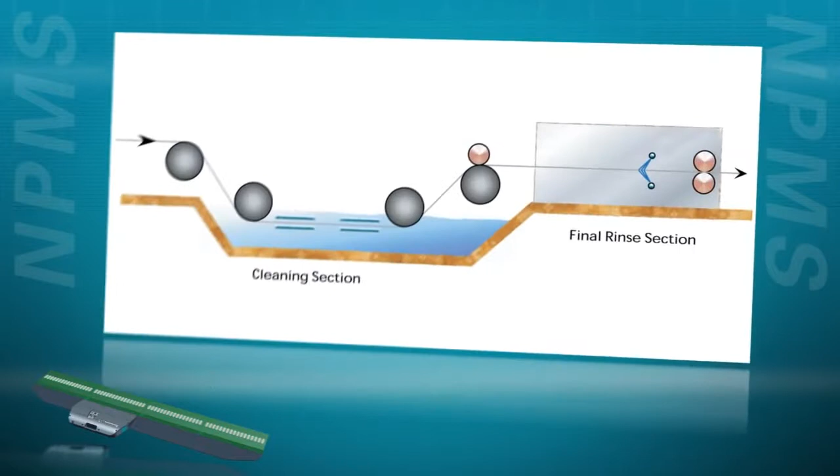What I would like to do now, if you fellows would bear with me a little bit, is show you some of the applications where the nip pressure measuring system can be very effective. You can use them on galvanizing lines after the rinse sections. You can use them on continuous annealing lines, which is a problem area, especially on the vertical pass line.

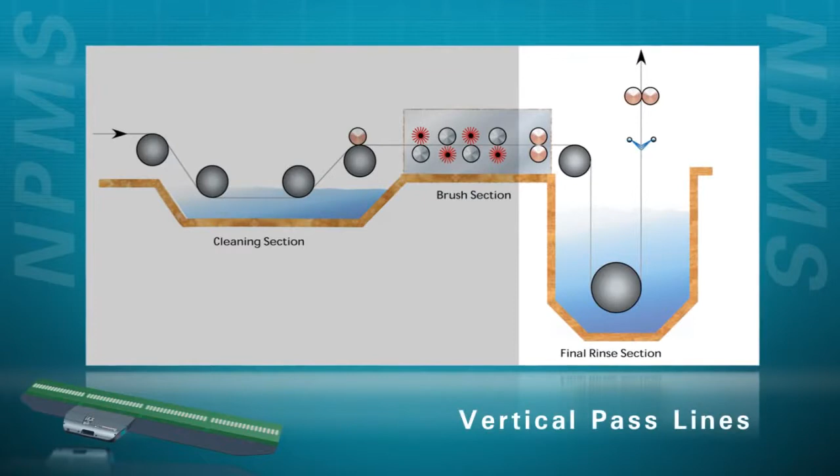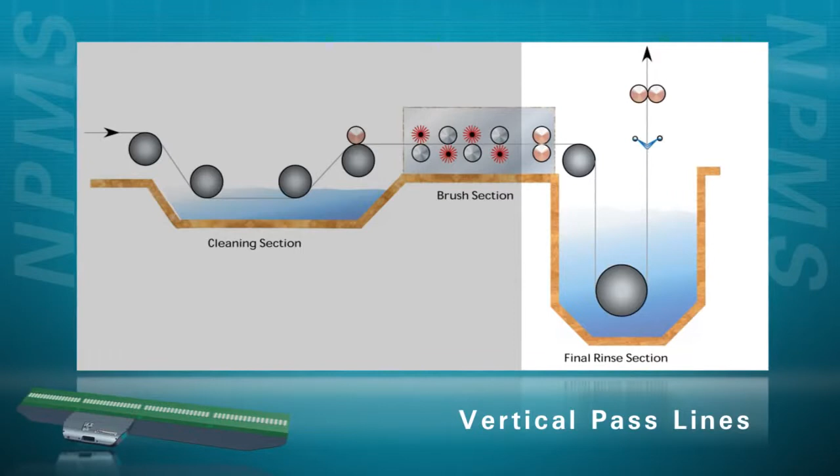Those rolls are hard to determine when they are ineffective. We can show you the condition of those rolls. They're very effective on pickle lines. They're really very effective on many process lines that you have throughout the mill.

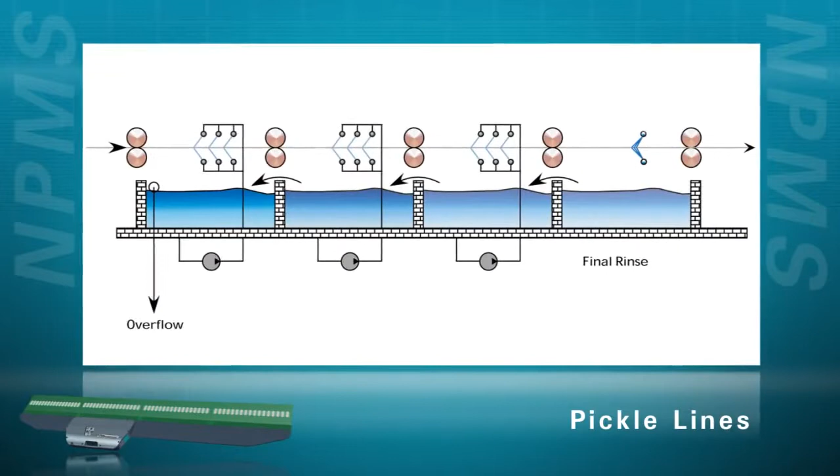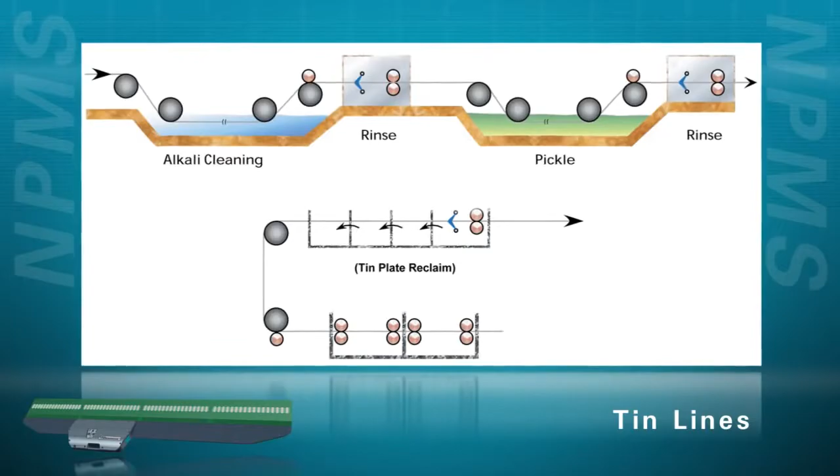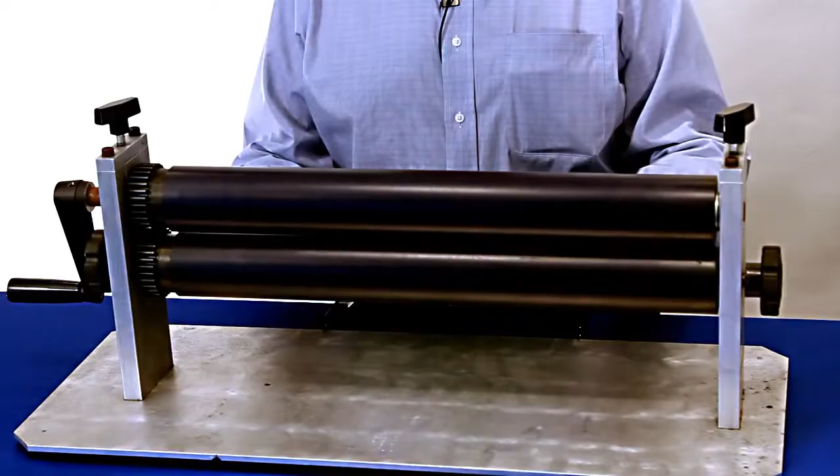What I'd like to do now is show you the real uniqueness of the nip pressure measuring system. So we have this model. We'd like to put it in front of you now. We have the instrument right here. Obviously it's only 18 inches long, and most of you have mills a lot longer than 18 inches. But for the demonstration purpose, I'd like to put this instrument between a set of pinch rolls.

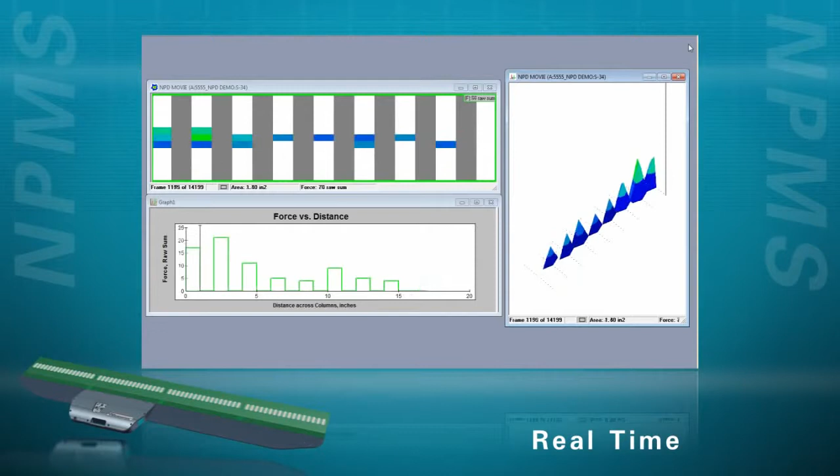I'd like to adjust the pressure and show you how it changes real time as the load is changing. One end to the other. You can see it in 2D, and if you look on the computer readout now, you can see it on 3D.

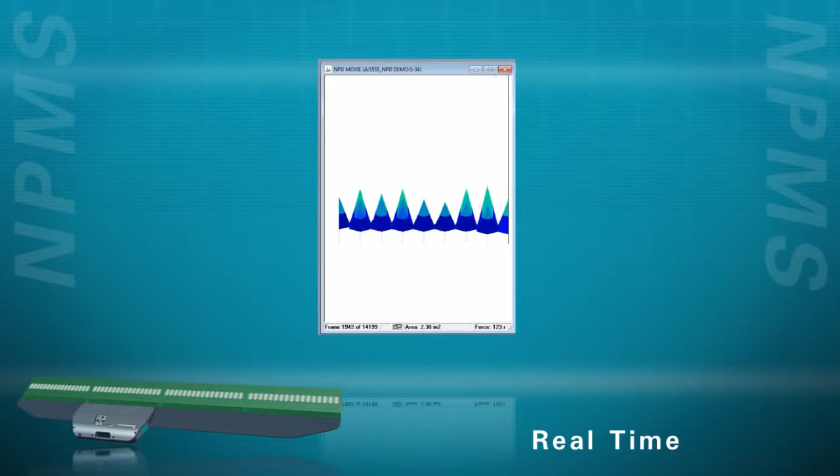Notice on 3D you can have it in the vertical position, you can have it in horizontal position, you can change it. And some of you fellows will have particular reasons you want to do that. That's in the software, and it's available to all of you.

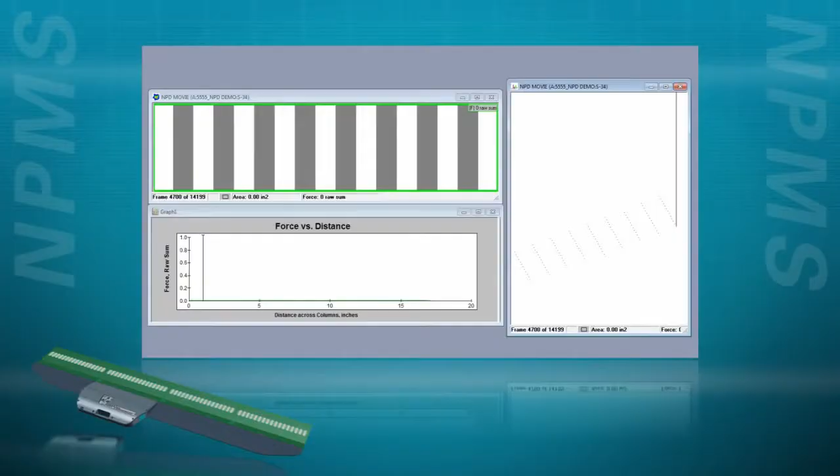One of the other features of the nip pressure measuring system is that we can show you misalignment of your rolls, a problem many people have. I can't misalign the rolls, but I can misalign the instrument. So I just did it. I'm showing you on 3D how the pressure is shown from one side of the image to the other side.

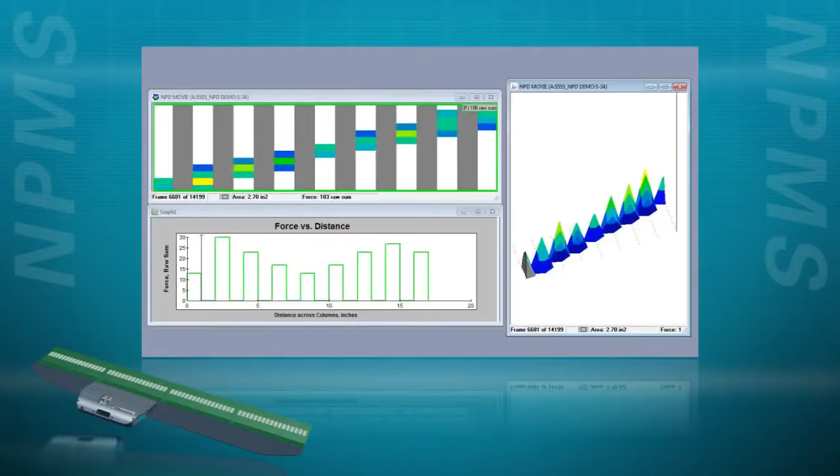You can see it in the horizontal, you can see it in the vertical, you can see it in the different planes. Now what I'd like to do is show you misalignment in the opposite direction. And again, I'll adjust the pressures. And you can see now, especially on the 3D computer readout, how those pressure profiles are shown on the image.

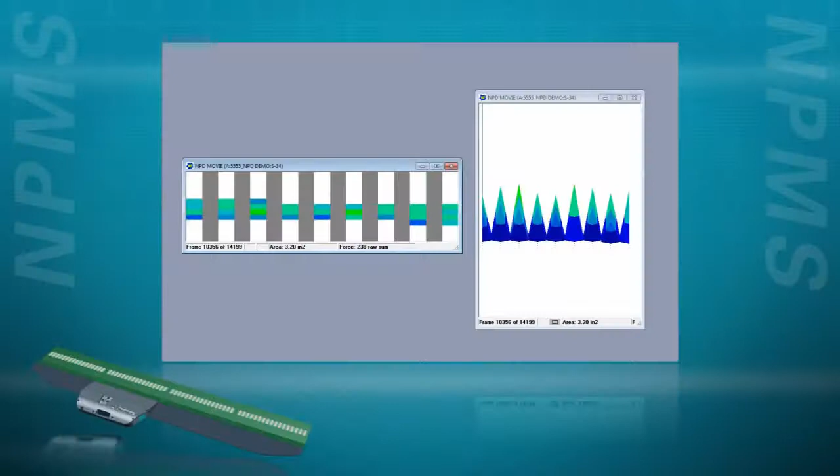So since you know the misalignment exists on the rolls, you can call your associate in, make the adjustments on your equipment, put the instrument back in between the rolls, and when you get the misalignment corrected, you should have a straight line readout, be it 3D or be it 2D.

The last feature I want to show you is the feature of roll crowning.

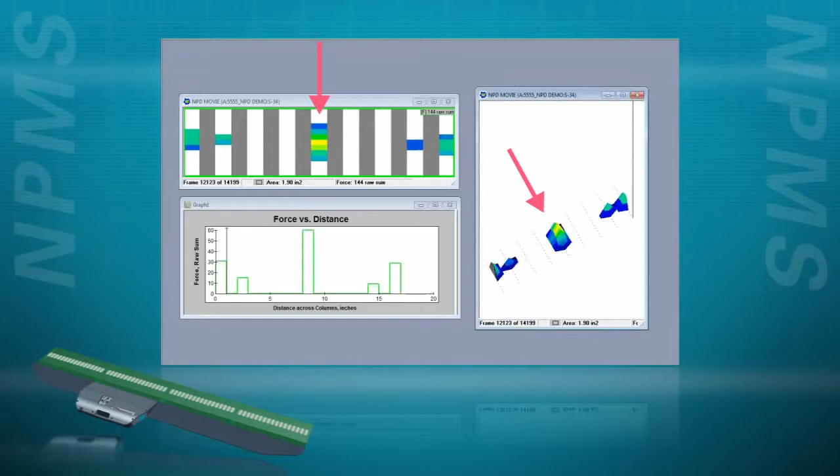This set of pinch rolls was deliberately ground in the concave center. I don't have a feeler gauge, but I have two name cards. They're about 8 thousandths, so I'll put those between the rolls, and I'll simply show you deliberately putting a crown in the rolls. And once again, as the pressure is adjusted, 3D and 2D, you can see the crown in the rolls.

You can not only see the crown, you can see if the crown's in the center of the roll. Sometimes we're told by roll grinders that the crown is centered on the roll, and many times we find out it's not on the center. This instrument will clearly show you that.

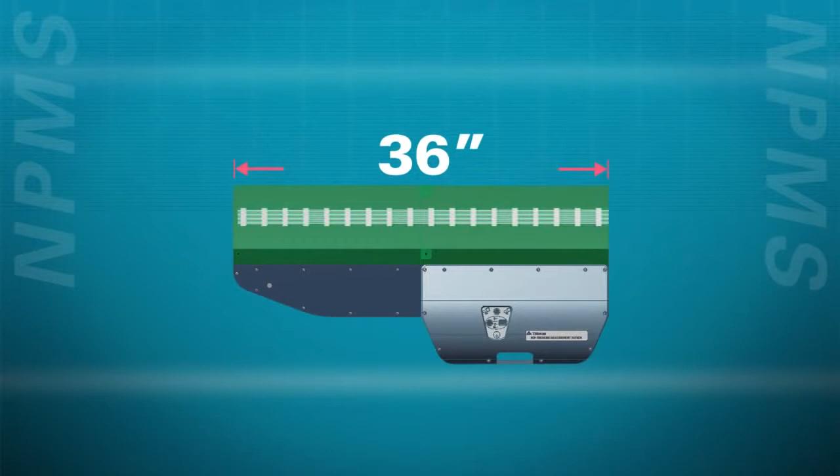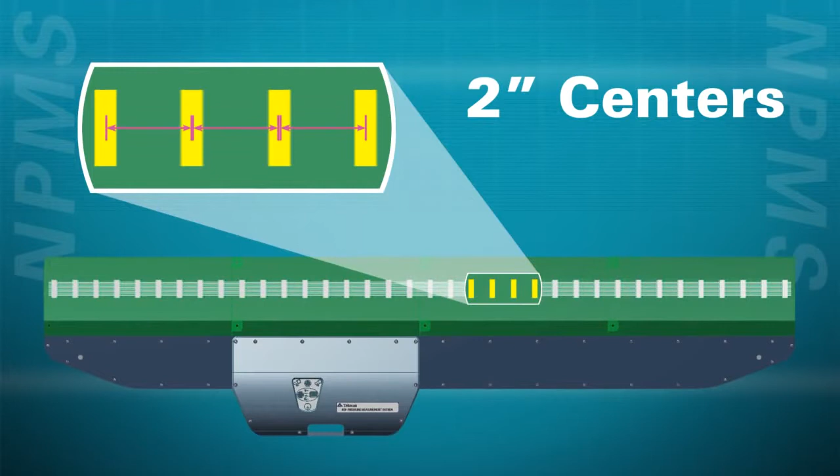What we'd like to do now to go on with our little talk with you fellows is to tell you a little bit about the design concepts of the NPMS system. We have the instrument designed for 4 different strip widths: 18 inches, 36 inches, 54 inches, and 72 inches. We have sensors that are located on 2-inch centers along the full length of the sensor element, and they cover a grid width of 1.5 inches.

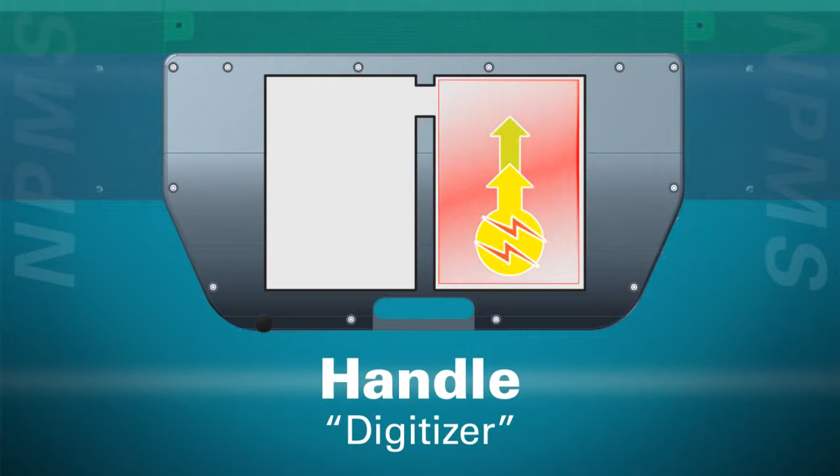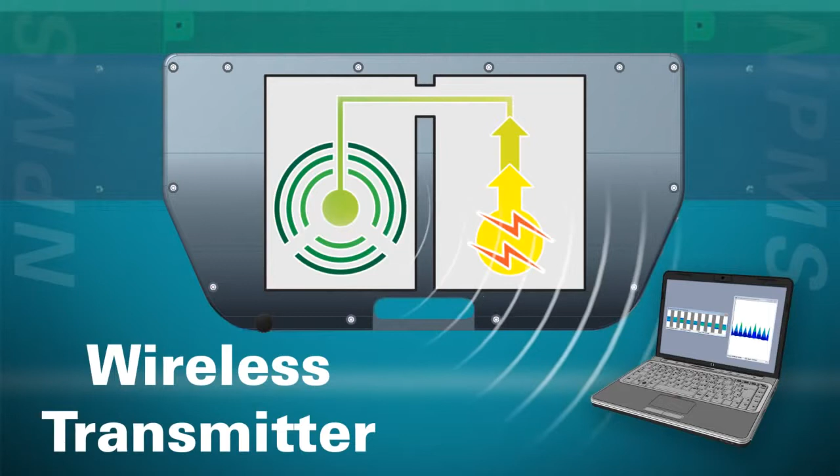The instrument is good for pressures from 0 to 500 psi. All of the wiring on the instrument is terminated at what we call a digitizer. It takes the analog signals and digitizes them into one common unit. Out of the digitizer we go to a wireless transmitter. From the transmitter to the outside computer there are absolutely no wires. It is a wireless system.

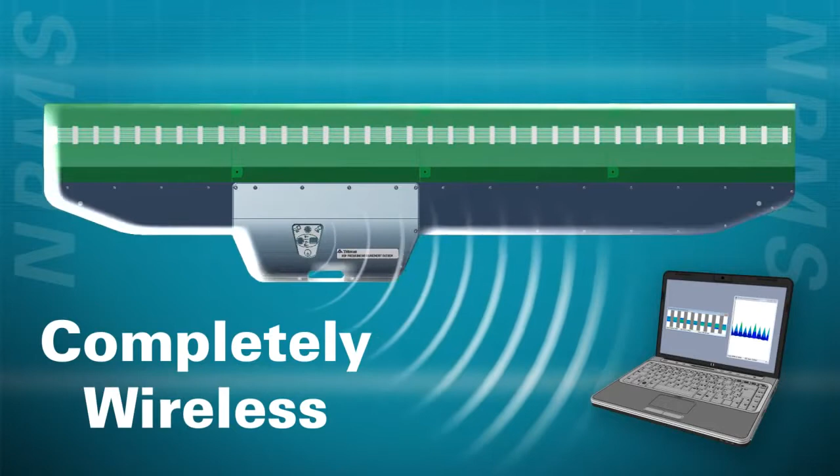The operator can stand offline or stand online with his computer, no wires to interfere with his work, and read instantly the pressure profile condition of the rolls. Probably the reasonable time to take a reading would be less than 5 minutes.

This instrument has been designed to be what we call operator friendly. What that means is you can send a new trainee, after he's been exposed to the instrument, out to the line, have him take the readings, record the readings, and bring them back to you. We believe you would like the instrument if you tried it. We believe it would be very, very accurate for you.

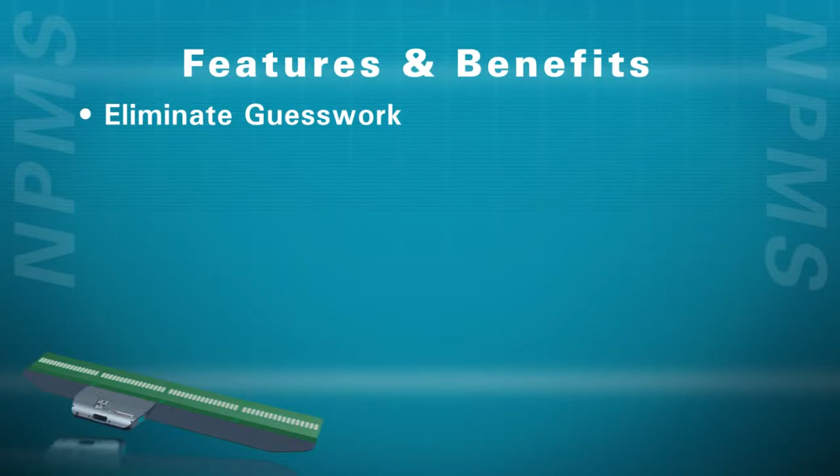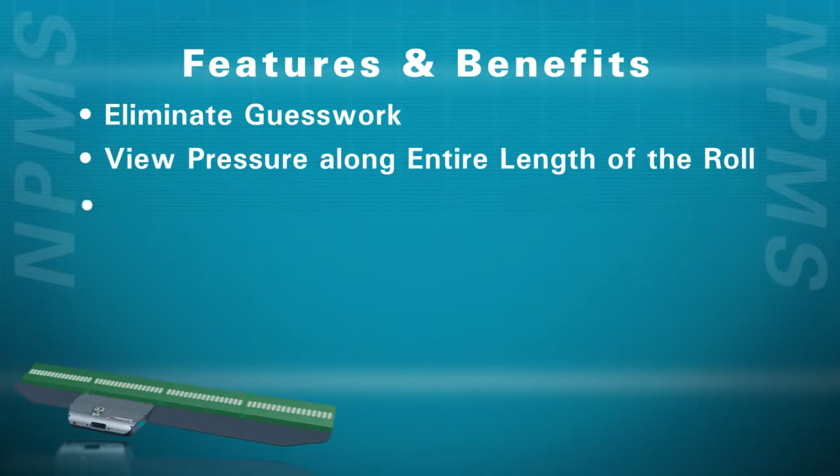You fellows have listened to our presentation on the NPMS system, and we appreciate that very much. Just in closing, what we'd like to do is show you some of the unique features and benefits of the system. First of all, the system completely eliminates guesswork on roll nip pressure profiling. You can observe the nip pressure all the way along the full length of your roll. The system is completely wireless. No wires to fall over.

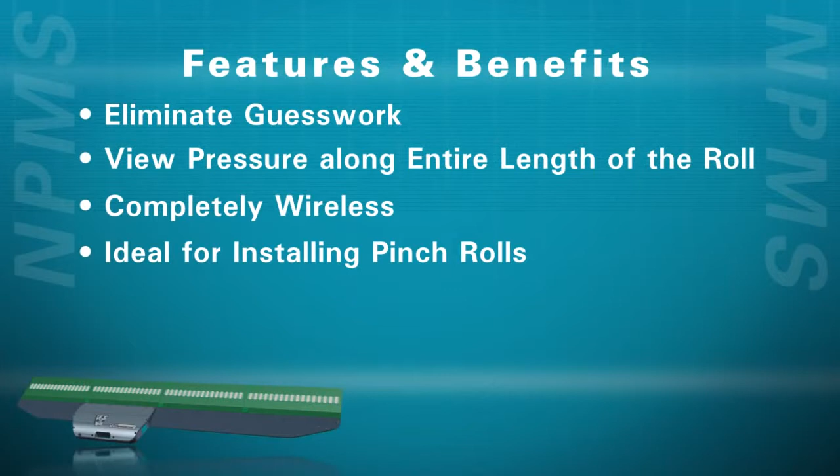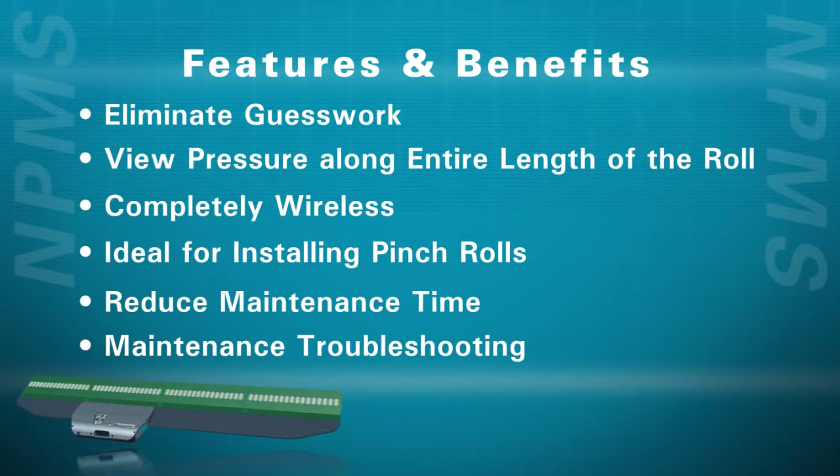The system is ideal for use in installing pinch rolls so that you actually know the exact pressure and the distribution of the pressure before you ever start your line up. One big factor is that this system really, really reduces preventive and operating maintenance. And because you can have the pressure profile saved, you really have an accurate record for maintenance troubleshooting.

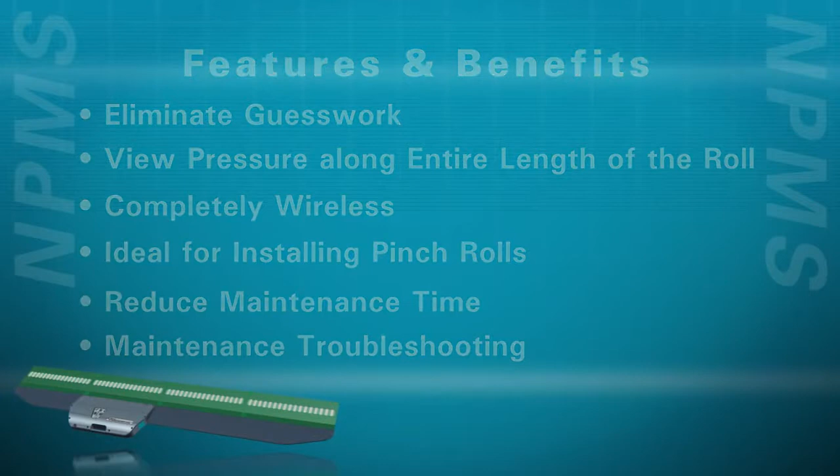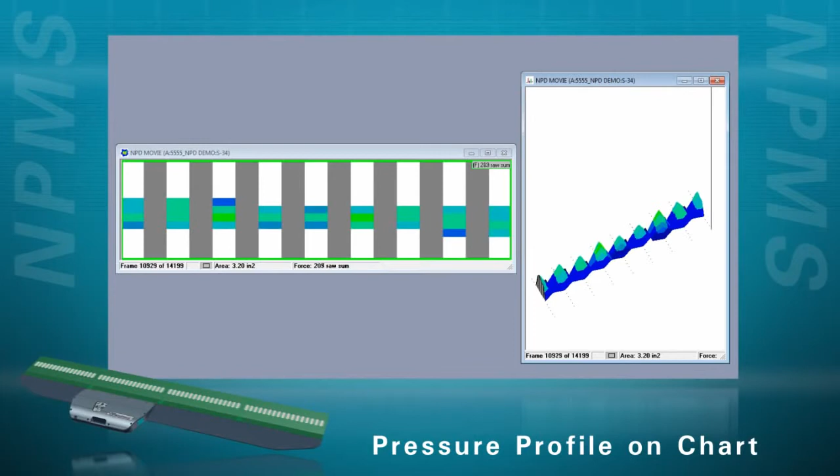Just a few more points in closing. The magnitude of the pressure as it varies across the roll length is shown on our chart, along with the exact location of any pressure that you want to study. The sensor pad is reusable for many hundreds of tests. And as I mentioned before, but it's really true, you can take an accurate reading in less than 5 minutes.